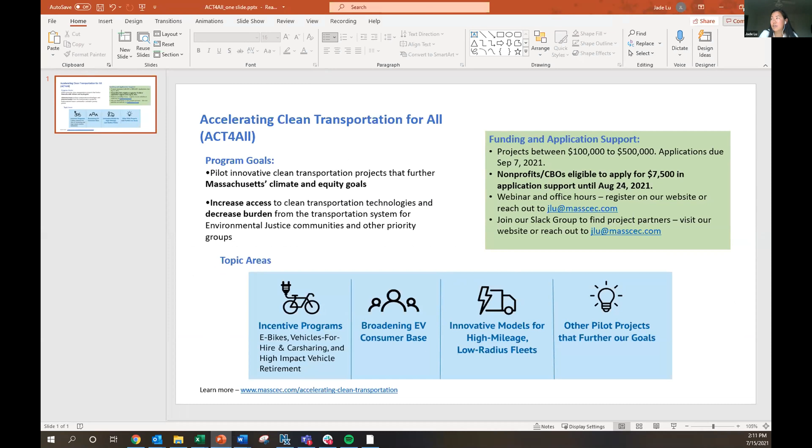It's a little bit confusing because one of our topic areas is the urban delivery area in Act for All, and we're also separately running a fleet advisory services program where we're hiring a consultant to do electrification services for different fleets. We're looking for folks to tell us this is a good fleet that would be eligible. So regardless of which program - that technicality - if there are fleets in the area you think would be a good candidate for electrification, reach out to us and we can take it from there. The takeaway is there are multiple opportunities for that under our programming.

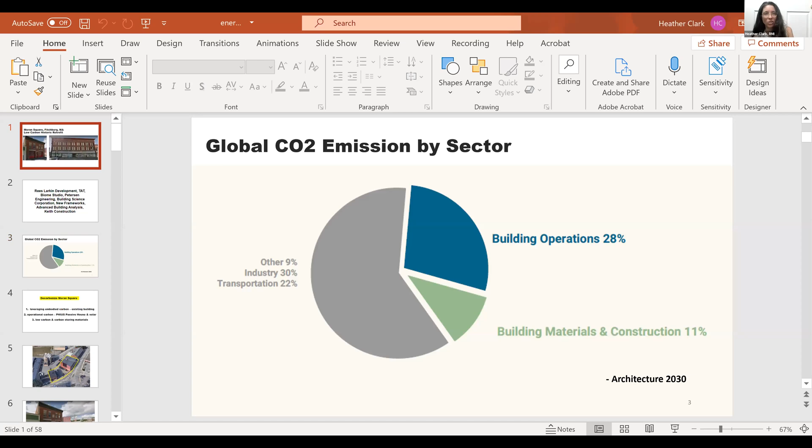So I'm going to be talking about Moran Square today, which is in Fitchburg, downtown Fitchburg. It's, we believe, one of the first, if not the first, federal historic tax credit projects that's also achieving passive house. But layered on top of that is another goal, which is to use low carbon materials.

Before I go any further, I just want to share our team who worked on this project. Reese Larkin Development, John Rudzinski is the developer on the project. TAT is the architect. My firm, Biome Studio, which now I am with Rocky Mountain Institute.

So this project is under construction right now. I got the project through closing, which was in May, the end of May, and then I transitioned over to Rocky Mountain Institute. At the end, I can talk a little bit about what I'm doing there.

Petersen Engineering is the MEP. Building Science Corporation provided huge amounts of help on various things. New Frameworks is the low carbon materials consultant, and Advanced Building Analysis is the PHIUS rater. I should mention too, Petersen Engineering was the passive house consultant, and then finally Keith Construction.

So with climate change, as we're considering how to tackle it, as you all know, I used to, many years ago, in presentations talk about how bad climate change was going to be, and there were a lot of skeptics in the audience. We don't have that now. I think we're all really coming to grips with this is a terrible thing for humanity. We have to deal with it, we have to deal with it now, and all of us have an opportunity to make a contribution.

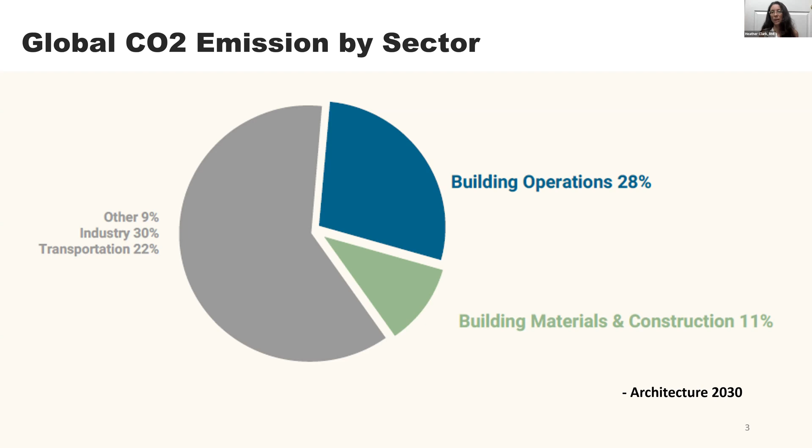In terms of global greenhouse gas emissions, buildings seem like about the largest sector contributing to climate change. Operations are about 28% of greenhouse gas emissions, but materials and construction are another 11%. So we have to not just think about how to reduce the energy load of our buildings, but how to build them differently. At Moran Square, we really focused on that pie chart, and that is how we used that pie chart to really define our goals.

So the first thing that we're doing in terms of decarbonizing Moran Square - I'm going to take a step back. A number of years ago, many of us still used the term green building, and I feel like that term just didn't fully capture how important our mission was. More recently, many of us are starting to use this term decarbonize, which means that we've got to get the fossil fuels out of our buildings, we've got to get our energy load down, we have to get near zero energy and zero carbon on our buildings.

So let's start to think about decarbonizing, we're on a mission to do that. So at Moran Square, our three goals: one is that we're leveraging the embodied carbon of the existing buildings. People put a lot of effort over 100 years ago to build these buildings, they used a lot of energy to do it, and we get to benefit from that. These are existing historic buildings that we can benefit from all that energy and carbon that went into making them, so we don't have to recreate it.

The next goal we have is to really reduce the operational carbon, meaning reduce the energy load of these buildings, and we're doing that by achieving PHIUS passive house certification. So this is going to be a passive house project. And then finally, we're using low carbon and carbon storing materials. So this is our site, it's a great location.

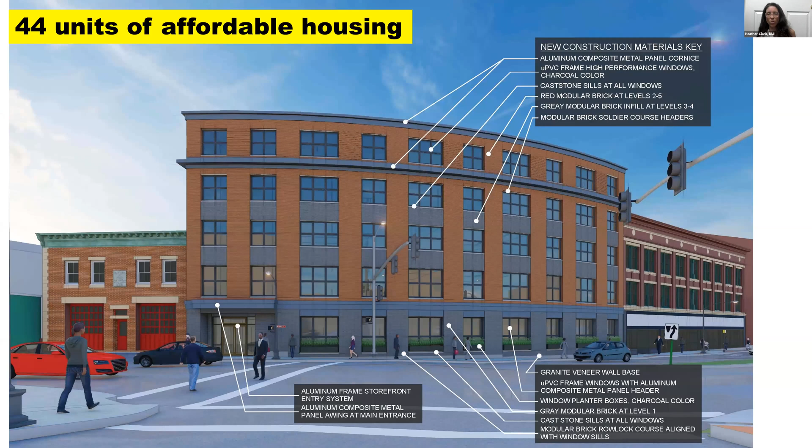Overall, we'll be creating 44 units of affordable low-income housing on this site. We're also leveraging federal historic tax credits, and that is the real trick of this project, I think, that we're trying to achieve both passive house requirements while achieving the requirements set by the National Park Service. As many of you know, the National Park Service oversees the federal historic tax credit program, so we've really had to work with them hand in hand to meet these goals.

So I'm going to start, even though energy probably has an even larger impact in the long term on a building like this and how much energy it uses, I want to start by talking about the materials we're using in construction, because that really informed the decisions we made on how we're going to achieve our energy savings.

So what does embodied carbon mean? Embodied carbon is the impact of all the greenhouse gases attributed to the materials throughout their life cycle. So all the greenhouse gases it took, say, for a piece of steel, a steel stud: the energy and greenhouse gases of extracting that metal from the ground, transporting it to a factory to turn it into steel, transporting it to another factory to turn it into steel studs, and then transporting it finally to our site. So all those steps have a huge amount of greenhouse gas as part of them, and we're trying to figure out how to limit the greenhouse gases.

So at our site, we're looking at all of our materials and trying to consider how to have the lowest carbon impact. But I'm going to use insulation as an example. The reason I'm using insulation to explain this concept of a low carbon material is because many of us have spent our careers, Lauren and others on this call included, working really hard to insulate our buildings, and we were very proud of our work leading that movement.

And then, lo and behold, we found out that some of the insulation we've been using actually has a huge global warming potential. Its impact on climate change is actually really bad. In the long term, unfortunately, the energy you save by insulating takes a really long time to offset all the carbon and greenhouse gases emitted to make that insulation. So we're all looking very seriously right now at the insulation we're using.

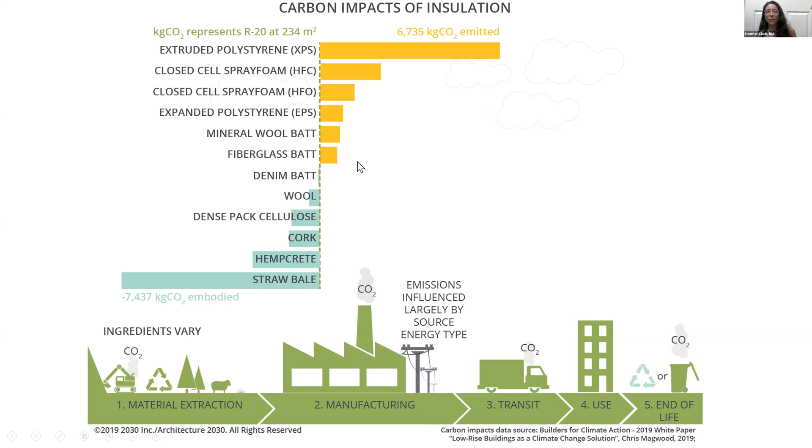You can also look at flooring the same way. So take carpet, for example. When you create carpet and then replace it over its life cycle, it emits a huge amount of carbon, versus if we could all afford FSC softwood or hardwood flooring, that does a great job of storing carbon. Marmoleum flooring is also a product that stores carbon.

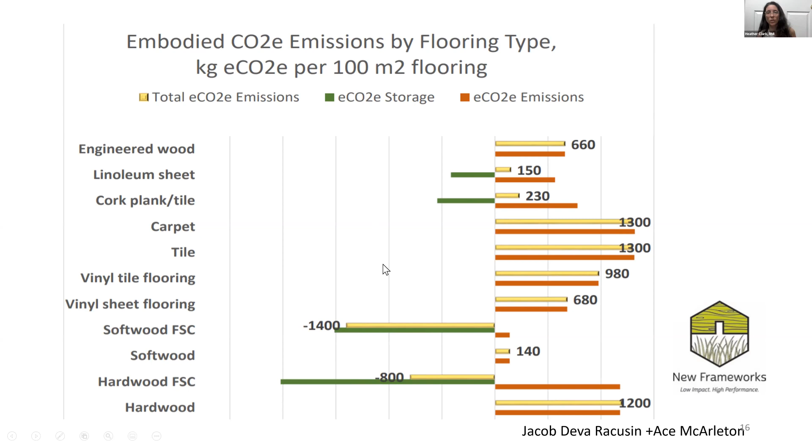So as we're thinking about materials, one easy way to figure out which materials store carbon and which don't is to think of natural materials. Natural materials tend to store carbon.

When I first became interested in green building, it was in the 90s when I was in high school, and there was a big natural building movement at that time. We were building, I was going out and volunteering to build straw bale houses, and that felt really good. These houses used very little energy to operate, but they were also made of natural materials, straw and plaster, clay and mud from the site.

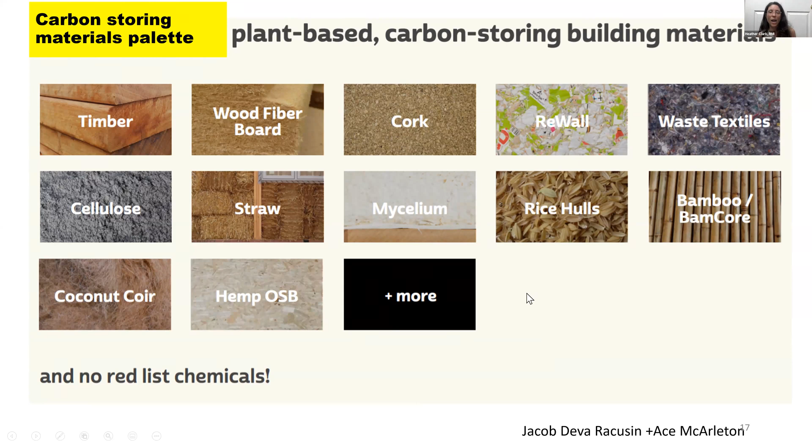That felt right. As the green building movement expanded since that time, we got really into huge industrial buildings that used a lot of unnatural materials, and a lot of them actually have a large climate change impact. So if we can get back to natural materials, that starts to get really exciting. You can use natural materials even in large multifamily buildings, like mass timber. You can build a high-rise building out of wood, which we're not doing here, but maybe we should have. That ends up storing carbon.

And the way we get our data is from environmental product declarations.

Another thing to mention is concrete. Concrete contributes to 8% of global greenhouse gas emissions. That's huge—we've got to figure out how to reduce the climate change impact of concrete. And on this project, we were able to do that.

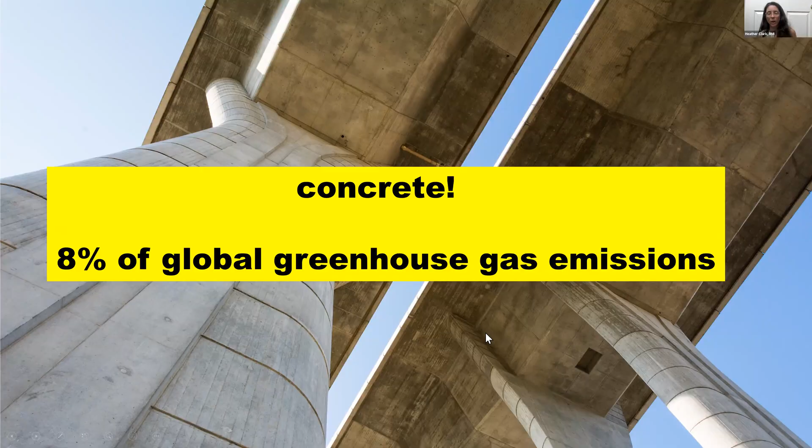So the first thing we're doing on our project from a carbon standpoint for materials is using less material. We're starting with existing buildings, and this is why, if we're able to appropriately retrofit historic buildings, they're already right off the bat using less carbon. Other goals of our project to reduce carbon involve the concrete.

We increased the fly ash in our spec and reduced the Portland cement. What we did was hire new frameworks—Jacob Racusin, who a number of years ago was the NESEA keynote speaker, talked about low carbon materials. We hired him to help us identify key areas where we could really reduce the carbon of our materials. He worked with our structural engineer to change our concrete spec, increasing fly ash and reducing Portland, which made a big difference from a climate change perspective. Our structural engineer approved that, and it was included in our spec.

On the insulation side, we're using cellulose insulation, which is recycled newspaper, mineral wool, and eco fiberglass. We're using Glavel, a recycled glass product that goes underneath the slab instead of foam. In one location, the ceiling of our parking garage, we couldn't get away from foam, so there we're using a low HFO foam—the blowing agent is low HFO, which has less climate change impact.

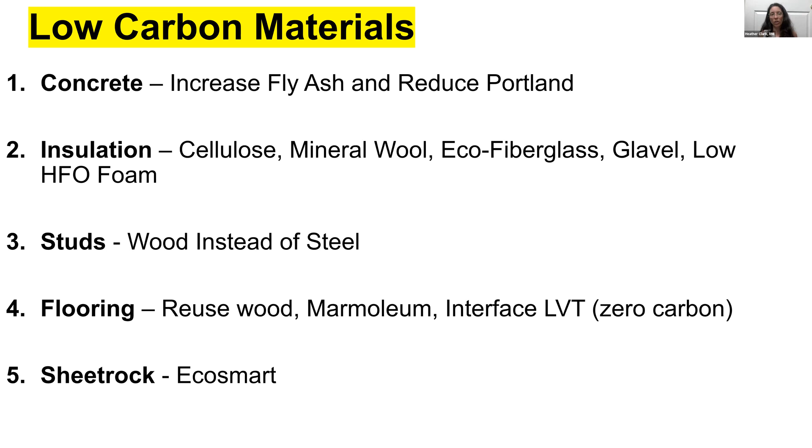And then finally on our sheetrock, we're using an eco-smart sheetrock, which has recycled content. So those are some of the approaches we're taking on the material side of our project.

On the operational side, we've got to figure out how to reduce the energy loads of our building. Many of you, I think your last presentation was on Passive House. Passive House is an incredible way and a very clear path to reduce your consumption of buildings. So on this, we said we want to do Passive House. Now, because it's a historic tax credit project, it's really hard to do that, but we're able to achieve it. I'm going to share some of our tips of how we did that.

We also, in addition to following PHIUS, we're also using solar. So we're installing a 100 kW system on our roof to get to very close to zero energy on this project.

Okay, so passive house concepts. Many of you have probably already done a passive house project, but if you haven't, I just want to talk about some of the big points of a passive house project. For this project, we're going through the PHIUS certification program. There's also passive house PHI, but we decided to work with PHIUS on this.

So the big takeaways are you need to have continuous insulation without thermal bridging, which is really hard on an existing building, so I'll talk a little bit about that. These buildings need to be very airtight, with very low air leakage. You need high performance windows and doors, and you need heat and moisture recovery ventilation. And then finally, minimal space heating and air conditioning. So you're able to really reduce your energy load because the building's really well insulated and airtight and has great ventilation, so you need very little space conditioning.

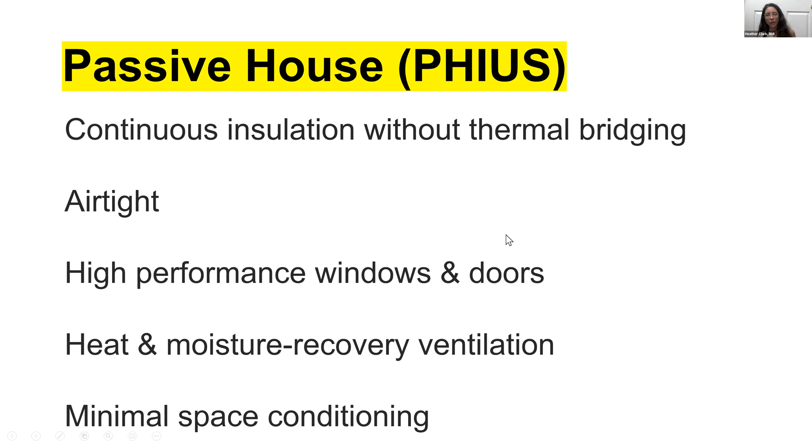Okay, so where is the air barrier? In passive house, the first thing you do is figure out where your air barrier is. So you have 6 sides of a box, and you prevent air leakage on all those 6 sides.

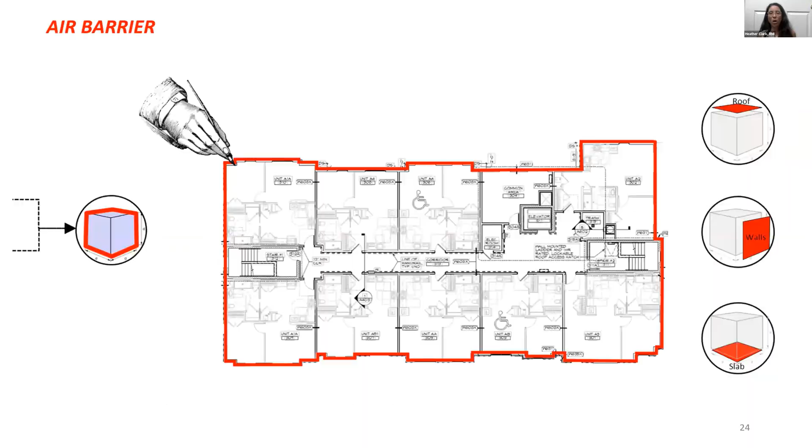In our project, we have these 2 historic buildings on either side with a new building in between. We talked to PHIUS and asked how they wanted us to approach this—should it be 3 separate buildings? What we decided in the end was that the whole project is modeled as one building from a passive house perspective, because we are sharing all of our mechanical systems. So we have one central mechanical system serving all of these.

So our air barrier includes all the residential parts of this project. The retail space is excluded from passive house, and I'm going to talk a little bit about that at the end, but please, if you do a project, don't forget your retail space. I've forgotten it on other projects, and it hurts the overall performance of the building.

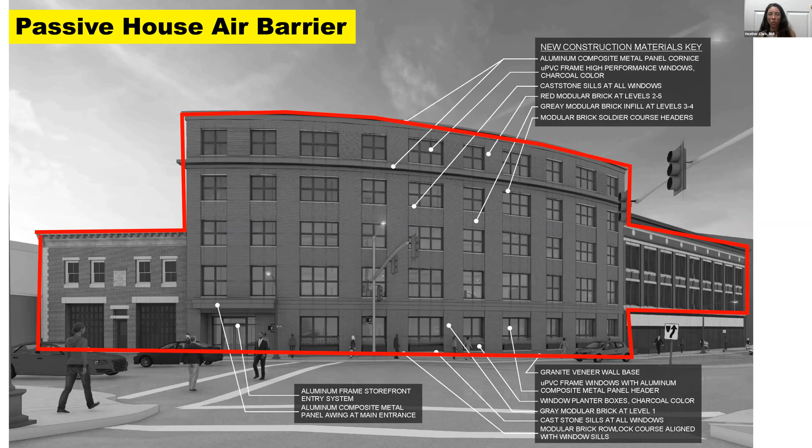Okay, so embarking on this, the first question was, can we do passive house and a federal historic tax credit project? We decided to do this and take the risk.

The reason why we felt like we could do it is, one, this building has simple architecture—it's not a really ornate building, it's really a box, this building, and then the firehouse. If it was a really complicated building, I think it would have been too hard to do as a federal historic tax credit project, but because it was a box, we felt like we could do it. The other reason is that it has simple windows—they're just double hung windows, 1 over 1. And then finally, there's limited exposed brick on the inside of the building, so we're able to insulate the inside of the building, which is huge. If we weren't allowed to do that by National Park Service, we couldn't do this project.

National Park Service, when they first reviewed this project for federal historic tax credits—I wasn't part of the team yet—applied for more of a standard renovation. So there were certain requirements put on the project by National Park Service that we had to accommodate when we designed it to passive house standards.

The first was windows. One of the biggest problems with achieving passive house is that you really need casement windows—double hung or single hung windows really won't work, there's too much air leakage. So the really important thing of this project is we got these casement windows that look like double hung windows approved for the project.

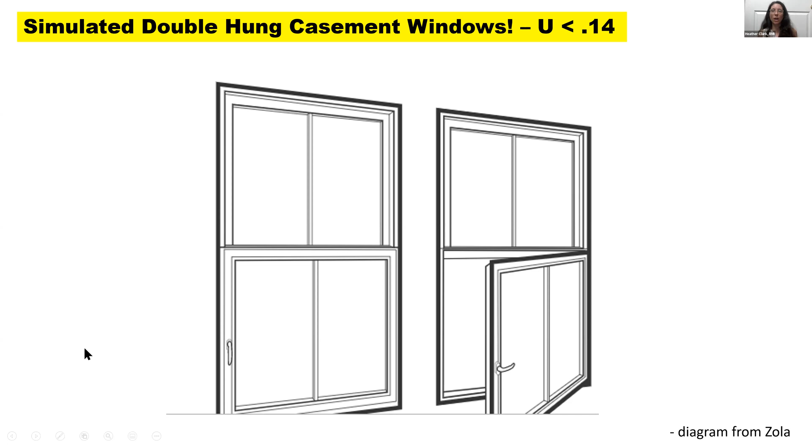This is a Zola window. We did not use Zola on this project. We're using Yaro, but I like this photo because it kind of shows you the different ways these windows can open. So they can open a little like a tilt, or open in this direction.

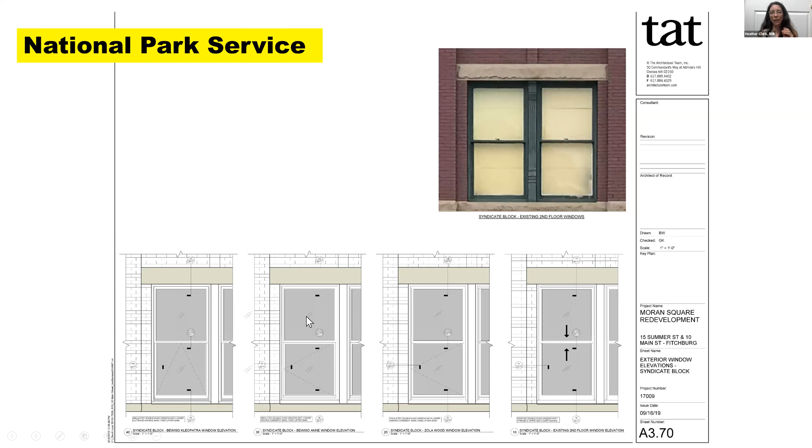This is key to the project, that we're using these simulated double hung windows. To our knowledge, no simulated double hung windows have ever been approved on a federal historic tax credit project to date. So we worked very closely, starting about two years ago, with National Park Service to have them review our window options. We started by showing the existing conditions of the windows, showing what a few different manufacturers could do in terms of measurements, how close they could get to the existing conditions. We went through this whole process of getting feedback from National Park Service to really select the window that would work for this project. Here is the beautiful result.

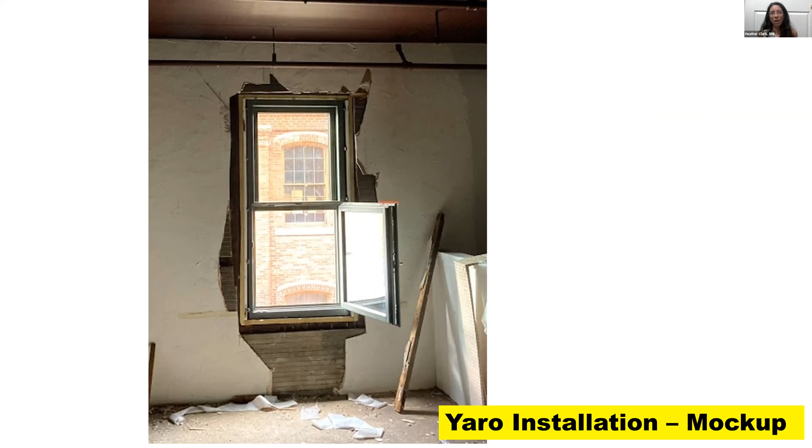This is like a mock-up where we were just experimenting to see how it could work. The window itself will have child guards on it, so it really won't open this far. But here on your left is the original window, and on your right is the simulated double hung casement window, and this is a Yaro window. It looks really good, but it didn't look good enough, so we did this mock-up and decided we needed to do better.

I do want to mention that we did a lot of work with National Park Service. It's our understanding that if this project looks good, getting these kind of windows will be easier, and getting passive house projects approved that are federal historic tax credit projects will be easier too. National Park Service is taking a close look at our project, and this could be a really model project, so it's easier for all of you to do one of these projects in the future.

Okay, so we installed our mock-up, and the first thing we noticed was they were really, really shiny windows. They looked almost like office windows, really reflective, and that's a no-go with National Park Service. It doesn't look historic. So the solar heat gain coefficient was too low. Basically, the solar heat gain coefficient is how much heat is reflected off the windows, and you want a lot of reflection, because then you have less air conditioning load. However, this was too much, it was too reflective.

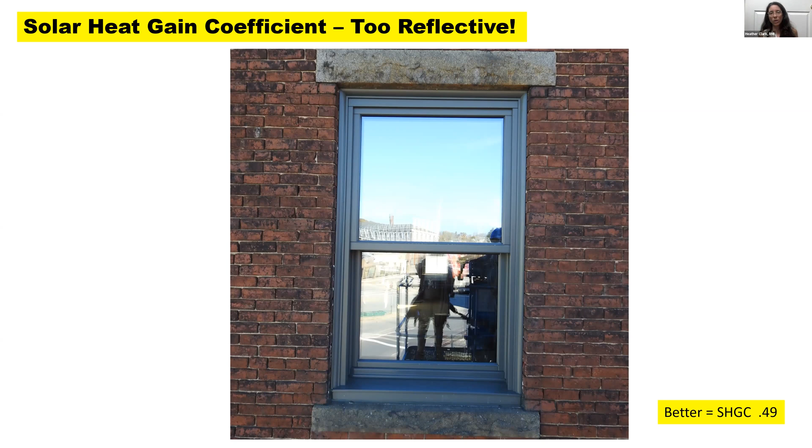So we ended up changing that in our second mock-up window. Another issue was the window was just too bulky, it didn't look good. You can see over here, it was too thick. So we ended up installing it again, and it looked a lot better.

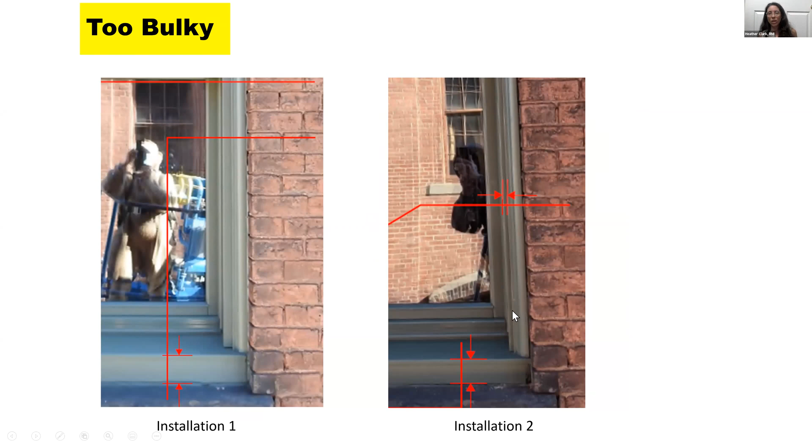The other issue was the meeting rail. The meeting rail was like the biggest issue here, because we're doing a triple pane window, and also because it's a simulated double hung window, there's a lot of hardware in that meeting rail.

The result was, in our first mock-up, when you looked down from the street and looked up, that meeting rail stuck out too far. It just looked a little bit odd, and it also created too much of a shadow. So in our next version of the mock-up, Yaro was actually able to thin that meeting rail quite a bit, and that made a huge amount of difference.

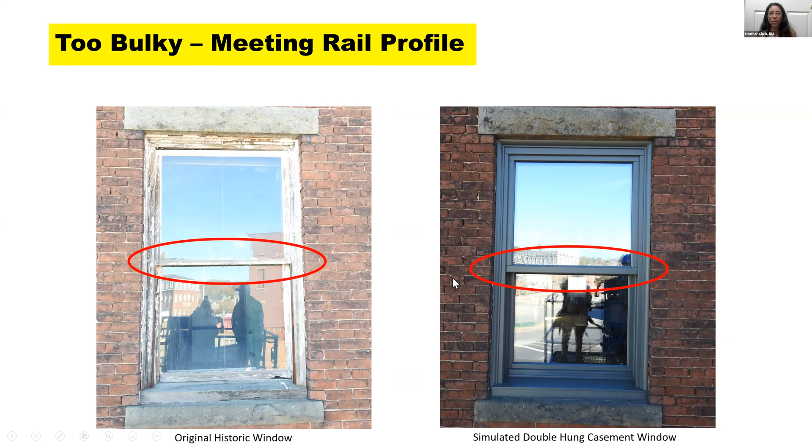Okay, so that's on the window side, and that was our biggest stretch on this project. The other issue on the project was wall section depth.

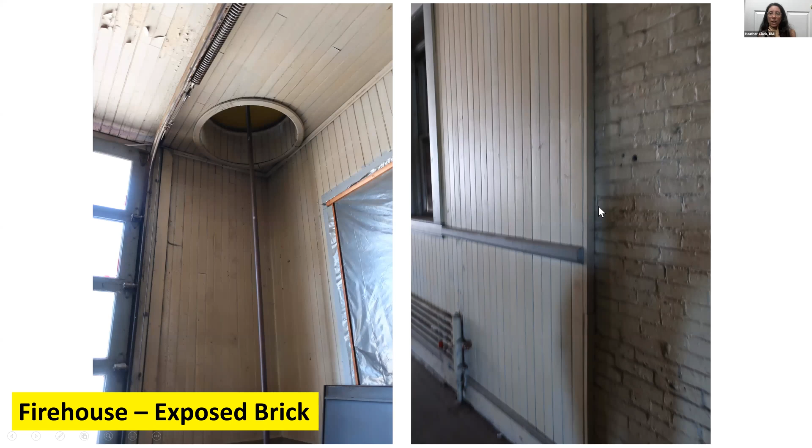This is what the building looks like. This is the firehouse, and this is one of the fire poles, which I think is really cool. National Park Service is requiring us in a few locations to keep the exposed brick, so that's a big energy penalty.

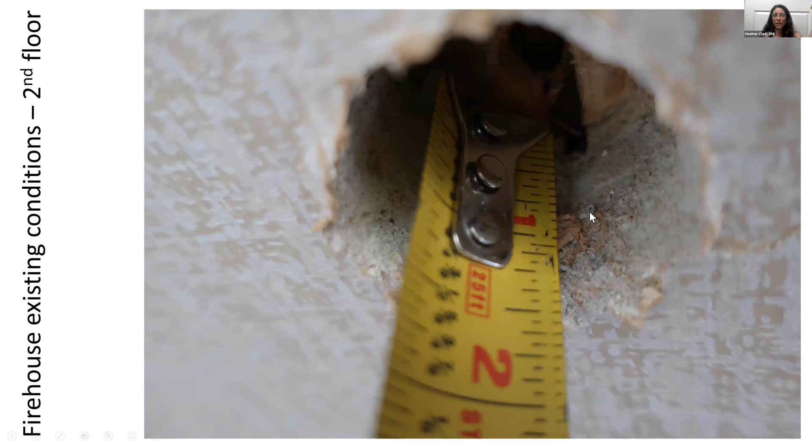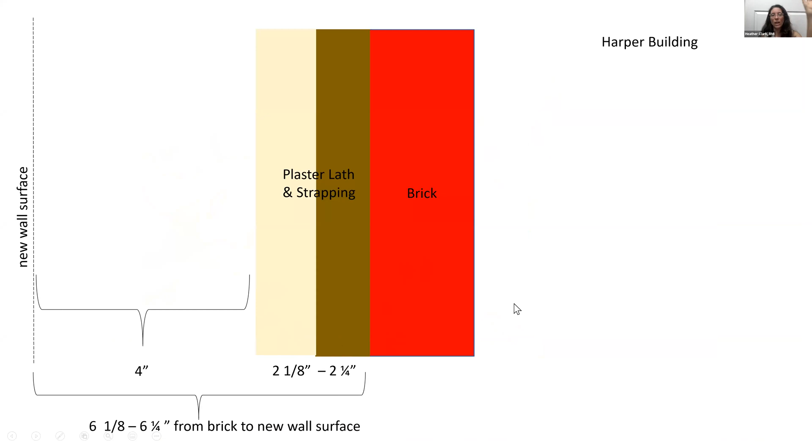So that's not very much to get to passive house, but we were able to figure out a method to do it. The first thing, going back to low carbon and low embodied carbon materials, is we wanted to go foam free.

And that's hard, because the easy way to do this would just be to use high density foam, and that would probably handle your air sealing and your insulation. But we said, no, we're going to try to do better.

If any of you have been in Building Science Corporation presentations, they warn you that you can have really terrible freeze-thaw issues within masonry walls if you get a lot of air leakage and moisture from the interior into that brick. That can cause spalling over time, and it can cause corrosion of studs and other things. So you really want to reduce how much air leakage and vapor can get into that brick from the interior, so that brick is able to dry out.

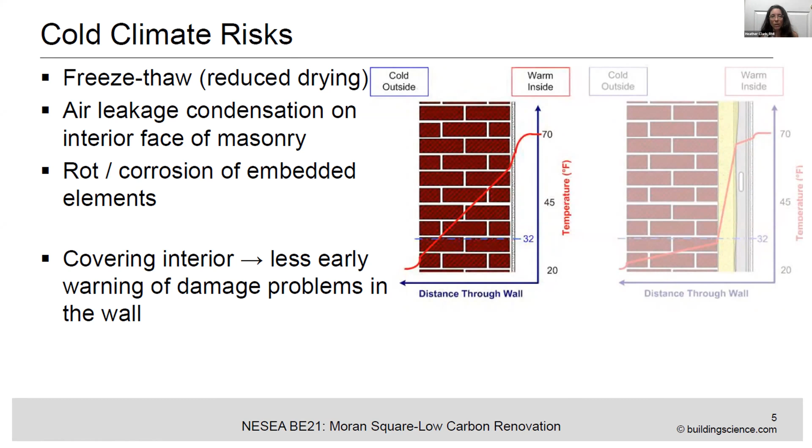So we have to be really careful — this is not something we can play around with. Like I said, the easy way to do this would be closed-cell spray foam. The other great thing we could have done, if we had more space, would be to have our studs have a nice mineral wool insulation layer, and then have service cavities so we could protect our vapor barrier, so that when people make holes in the walls or do other things, they don't damage that vapor barrier.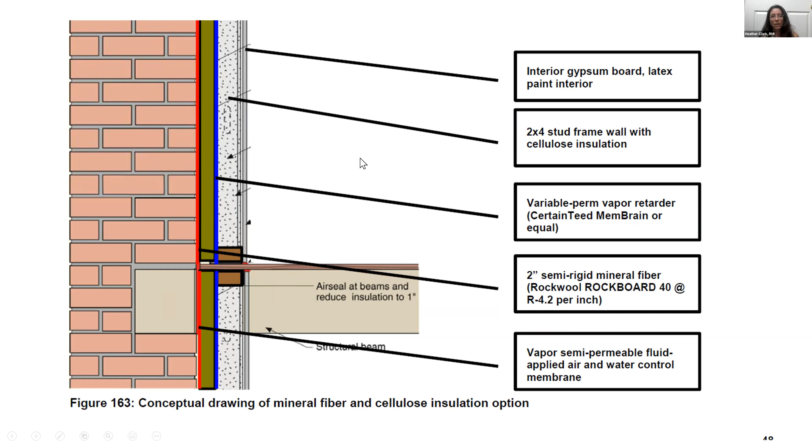But this is a pretty complicated thing to build, so it will be interesting to see once we really get into this construction what this looks like. The other thing I mentioned is under the slab. Many of us doing passive house projects in the past have used foam insulation under our slab, which works really well, but the climate change potential is still high because it's foam.

So what we're using is this product called Glavel, which is made of recycled glass and acts like gravel, which is really cool. You don't need gravel, but it's insulated—it has an insulation value. There's a new factory being created in the Vermont area, so this will be a relatively local product.

On the operation side, I want to call out the building storefront. A lot of times in the passive house program, we only get the housing portion certified, not the ground floor storefront. We're very focused on making sure that storefront is as energy efficient as possible, because it's the right thing to do for tenants' energy bills and from a climate change perspective. But also, if you don't deal with your storefront and ground floor, it causes a big energy penalty to the units above.

One of the issues is we're required to keep this Art Deco glass facade and this aluminum single pane retail facade. So what we're doing is building an interior glazing wall that will create our air barrier and thermal barrier, but on the outside of the building it will still look the same.

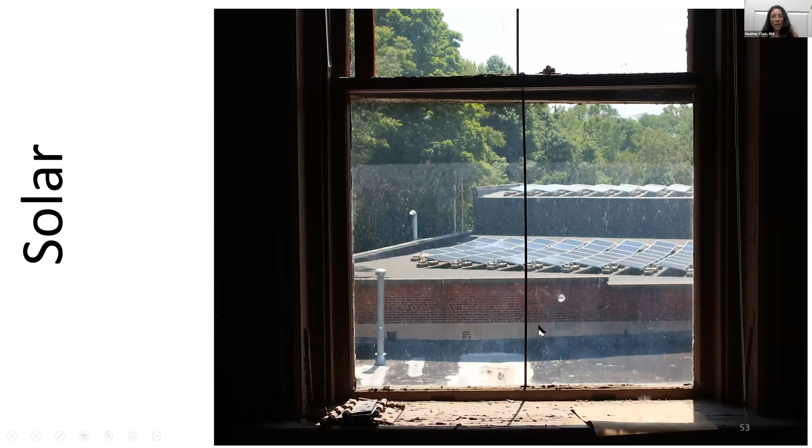And then finally, we've dramatically reduced our energy load, so then we're installing solar. This is the roof of the building next to this project. It's pretty exciting—it's a great site for solar already.

We're installing solar on the new building and the 3-story building, but not on the firehouse because there wasn't a lot of roof area. There were shading issues, but also concern from a historic perspective that you'd see it from the street.

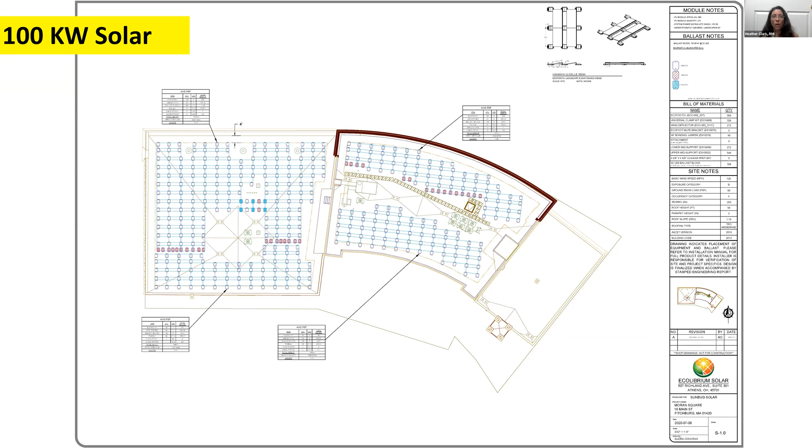It's really important for a project like this that we're meeting the historic requirements, both from a tax credit perspective and because it's the right thing to do. We want this property to be a beautiful asset in Fitchburg that celebrates the historic nature of the community. So we're trying to do the best job we can to achieve both our climate change goals and our historic goals, while providing 44 units of really high quality, low-income housing to this community.

On the energy side, we're using passive house, solar PV. On the concrete side, we've reduced Portland and increased fly ash, which makes a really dramatic difference in terms of greenhouse gas emissions.

Now, on the siding of the new building—and I alluded to this before—we really didn't want to use brick because it has a large climate change impact, but National Park Service required us to do so. I'm going to talk a little bit about that right before I complete the presentation.

On the insulation side, we did a really good job: cellulose, eco fiberglass within the demising walls for sound, and then mineral wool and Glavel. But we did have to compromise—we're using low HFO foam in the parking garage, though we are using no XPS. On wood instead of steel studs, we were hoping, and then the flooring and countertops—we wanted to use FSC wood, but it didn't work for this project financially.

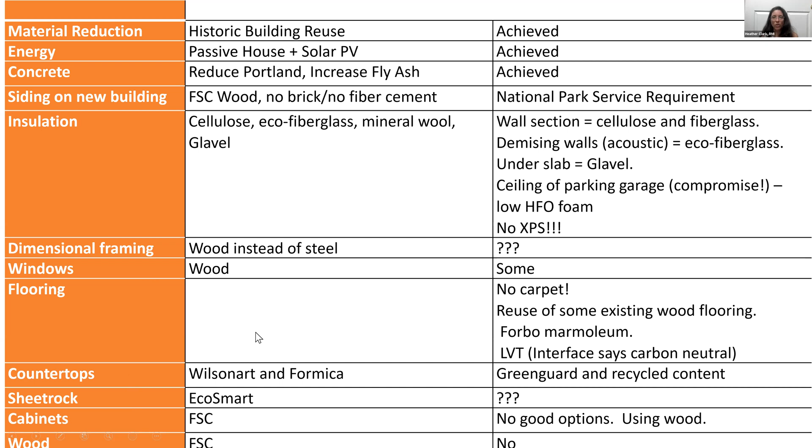Before I conclude, I want to talk a little bit about brick, because I bet many of you are specifying brick buildings because they're less maintenance over time and they look great. Brick creates a lot of greenhouse gases to produce. You can see here, for example, this is brick over insulated metal panels or metal studs, and the greenhouse gas emissions are actually quite a lot.

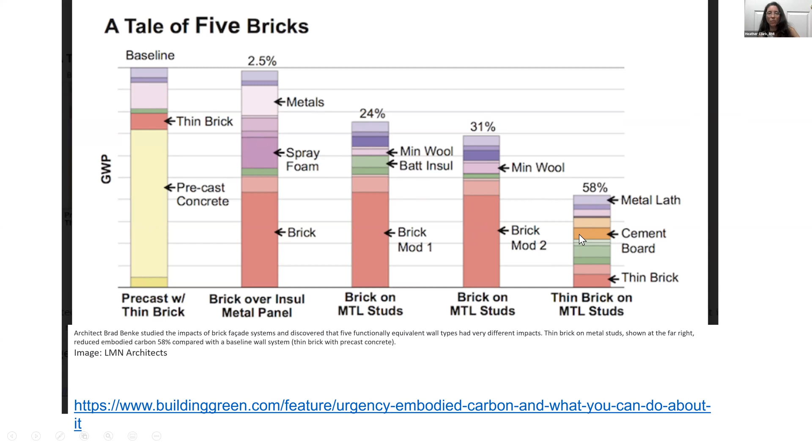Even thin brick, if combined with precast concrete, has a big global warming potential. Ideally, if you can on your project, consider using thin bricks—especially if you can—since thin brick has a much less global warming potential than regular brick. It's really something to consider. On this project, further down the road in construction, we were not able to use thin brick just because of timing with our drawings.

However, we are exploring this product called Green Leaf, which is a brick made of recycled content. A number of universities are using this, and I suggest if you're using brick, this is a product that you can look at.

The last thing I wanted to mention is team coordination. We are doing passive house, and our contractor and other team members really got that - we have to be passive house certified, we have no choice, they have no choice, they can't cut corners there.

However, on the low carbon materials side, we do not do a low carbon materials certification program, partially because we didn't have funding, and also because those programs were just in their infancy when we started this project a few years ago. I wish, and I would on future projects, if I'm trying to use low carbon materials, try to do some kind of certification program, just because it makes it easier for some team members to glom onto a checklist and know there's a certification they have to meet. As a result, they're not as apt to just say, yeah, we're going to get rid of all the wood studs and go to steel. It's easier on the value engineering side to keep certain team members in line and focused. I think that has to do with personalities and how different people think, but that would have really helped on this project.